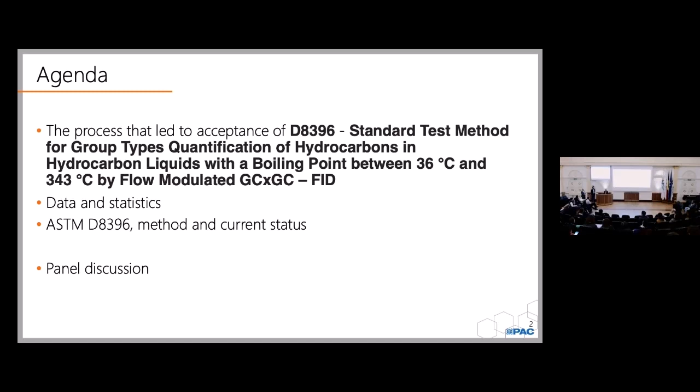So, this one. So then now I start with the story of the D8396. I call it step one, that's the idea phase. PAC, we develop all kinds of applications on request of the refinery. So we saw a need, but also discussions at ASTM.

There were discussions that we need an analysis with more, resulting in more information about especially diesel fuel and jet fuel. Most of the methods for those two products are performance-based, but there was already a need, especially with the coming of all the renewables, for more information about the composition. So a group type analysis for those fuels.

ASTM said, why don't you do it? You're here all the time, so why don't you take that task? And since PAC already had some instruments in the field, I thought it is a simple task, we can do it. In the end, it took 3 years. We are not done yet, but I think it's a very interesting project.

So we decided to start the process and decided that we would go for a generic method. In standardization, you have two choices. You can write a test method specifically for one instrument from one vendor, defining every little step of what to do to get to the result, or you decide to develop a more generic method that more suppliers can comply with, so it can be bought from more companies. In this case, we decided to go for the second one.

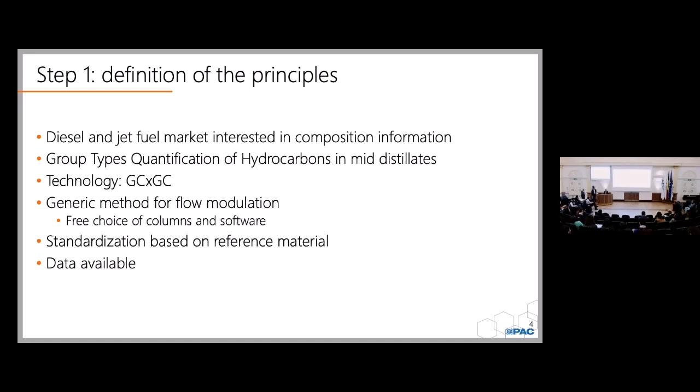So with that, we had to go and look for an organization who would, let's say, facilitate the process. And I say facilitate because all those global organizations, they don't do method development themselves. They only facilitate the process. The stakeholders are the ones who develop the methods.

There were a few choices. Of course, first of all, ISO. It's well known from ISO 9000 and such. It's a global organization, and they have an active technical committee for petroleum, TC28. The members of ISO are almost all the countries in the world. So the national standardization bodies of a certain country, like DIN for Germany, is a member at ISO petroleum.

We also had a choice to go to CEN. CEN is the organization that develops the EN methods for Europe.

And then the members are the European countries, plus a few extra, like Norway, Turkey, Israel. They are also members of CEN. And of course, we have ASTM.

ASTM is well known within the petroleum industry, but it's an American organization. Here you can see that ASTM is part of ANSI, and ANSI is part of ISO. DIN, we said before, is part of CEN, but also part of ISO.

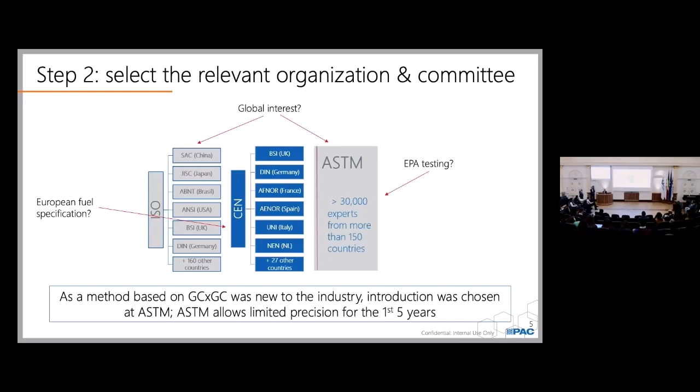So we had choices, but the discussion started at ASTM. ASTM was the first choice, and also for another reason: ASTM has a very low threshold to start method development. They allow an interim precision for the first 5 years. ISO and CEN will only start method development, or facilitate it, when you're completely done and have a full precision statement. Later you will hear what that all entails. So for the 8396, we decided to start at ASTM.

So we found ASTM, but then ASTM, of course, is also a very large organization. They have groups for anything—for toys, paint, anything. But for petroleum, it is D02.

And within D02, there are again a lot of subcommittees, task forces, committees, sections. But there's one specifically for hydrocarbon analysis: D0204. And within D0204, there are again different sections, and one for gas chromatography is section L.

So, for example, liquid chromatography would be section C. Every technology has its own section. So for the GC times GC method, the best section would be D0204 section L—so we went there, or we are a member of that group.

And that group meets twice a year. Actually, the whole D02 meets twice a year. Imagine that it's somewhere in the US, in a large hotel. They rent the whole place, all the meeting rooms, and then like 1,000 members come, and there are several meetings at the same time. You can walk in, out, and discuss all kinds of methods.

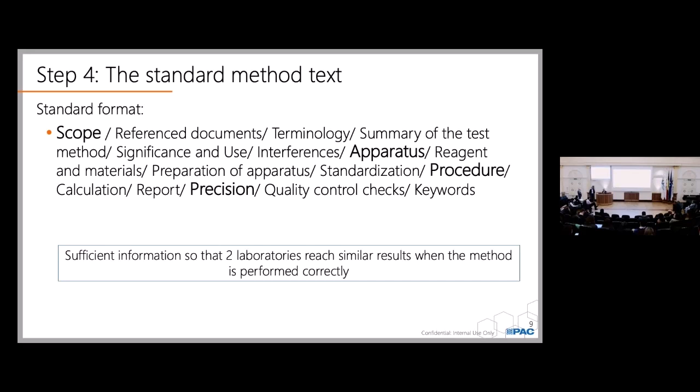It's also very important to write exactly what needs to be done, because the more strict the procedure is, the better the laboratories can follow that procedure, and the better precision you can expect. So it's always that balance on how much do I write down, how much is for the own interpretation.

So when we wrote a method, then there is this acceptance process, and that is through balloting. There are two stages. The first stage would be a subcommittee ballot, and the second stage would be the main committee ballot. Subcommittee, that's generally the experts, so they really know the technology or the application, and the main committee, that is the whole community, and they could have a different interest.

So the first step for us was to submit our method to ASTM, and then it is electronically distributed to all the members. They read it, they have a month to read it, and they can comment on it then.

One reaction could be, I don't know anything about it and I'm not interested, so they vote abstain. Some people might say, oh yeah, I like it and I totally agree with it, so they vote affirmative. And some people would say, no, this is not good, but it's minor, so they send in a comment, and then it's up to the technical contact to implement the comment or not. Or they say, no, this is not good, it has to change, and this is my proposal how to change it. And that is called a negative.

Now, in ASTM, it's 100% agreement. So if there's one negative, one person, anywhere in the world, you have to start a discussion with this person and resolve the negative.

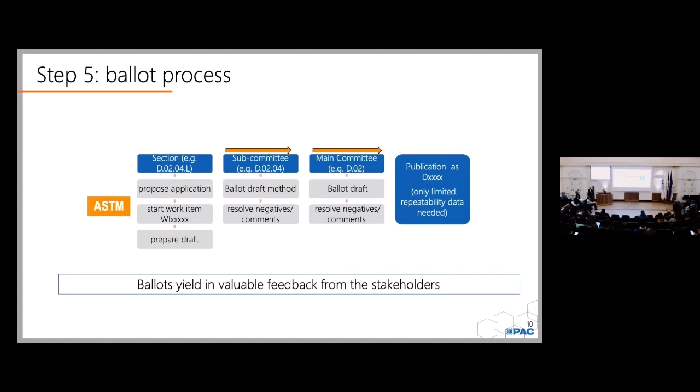So I said already before that ASTM is a bit different than CEN and ISO. And this is kind of an overview of what the main differences are.

So ASTM, those are the industry members who vote. So you deal with individuals. And for CEN and ISO, the members are actually the countries, so they vote. So it's not depending on one person, but on a whole country. And then those votes are even weighted, so if the larger countries vote positive, then you still can continue. At ASTM, you have to have 100% agreement. And for CEN and ISO, it's 71%.

Precision, very important. If it's a new technology, start at ASTM because you have some room the first 5 years. And for ISO, you have to start with a complete precision at the start.

Meetings, ASTM is very organized, so it's always the 3rd week of June, 2nd week of December. You all know for the next 10 years where you will meet and what days. And CEN, it's more on a need basis. Method updates, at ASTM you can update the method anytime.

That's also a complaint from CEN, so it could be twice a year, and then CEN also has to update their methods twice a year. That's why they prefer their own methods. And the ballot process is similar, it's at two stages.

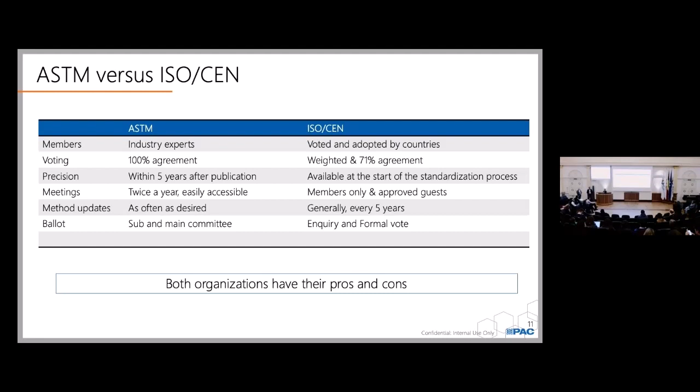In ASTM we call it sub and main, and in CEN we call it inquiry and formal vote. But anyway, after those 8 rounds of ballots, we were through, and the method was published in 2022 in April, ASTM D8396.

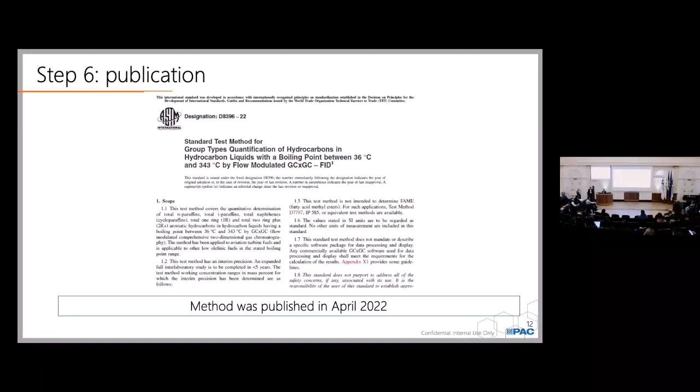We continued, and actually this was the section for John Sims, our statistician, because it's all about precision. We continued, so I didn't want to wait the 5 years.

We were going to work on a precision statement, that is a repeatability and a reproducibility calculation. And for that data, we were going to organize an interlaboratory study. All of this is really described in detail in ASTM method D6300 and ISO 4259.

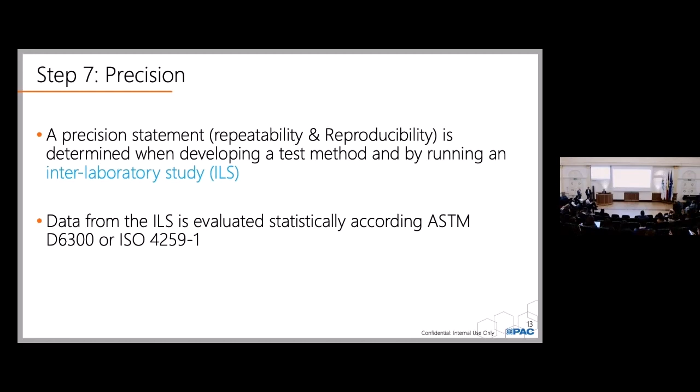So for the repeatability, we are looking at how well two results compare when the same material is used, the same procedure, the same lab, same equipment, same operator, and on the same day. So for example, when we divided and sent around our samples, we had to make sure that people could do the samples on one day.

For reproducibility, we're testing the variance for the same material, the same procedure, so the same test method, but then a different laboratory, different equipment, different operator, and maybe the same day, maybe not, we don't know.

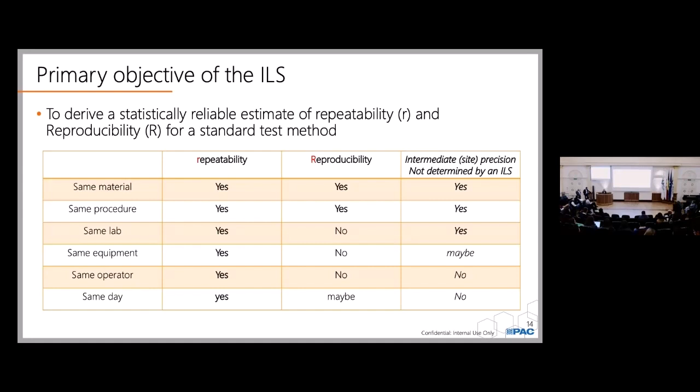Requirements for an interlaboratory study: it's quite a big study. First of all, you need a strict protocol. It's different from those round robins, where you can run the sample according to your own method. But in this case, you need a strict protocol, and the members should stick to that protocol.

The protocol could be the test method, or it could be the test method plus some additional requirements. Minimum are 6 laboratories and enough samples to get 30 degrees of freedom. That's something we cannot get around. 6 laboratories is really the minimum. For the 8396 we used 21 laboratories and 21 samples, just to make sure we get the right number of degrees of freedom.

And also in this ILS we tested different setups. It was a generic method, so people could use different columns, different modulators, different software, and we wanted to test how well all these variables compare.

The samples shall cover the range of the method, so the percentage - if it's 20 to 40% what you want to test, then those samples need to cover that range. So you really have to design your ILS well and make sure that all matrices and ranges are covered.

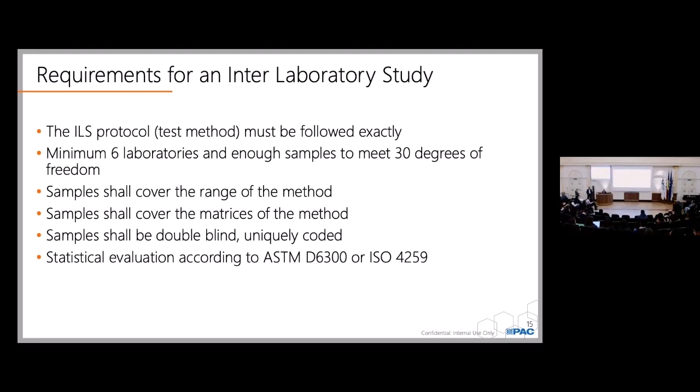These are the methods we use for the statistical evaluation. Now, variables - what we have to focus on, and that will also be a question later in the discussion - we really have to control all these variables in order to get similar test results: environment, equipment, operator, procedure, material. That's what we need to control when we determine the repeatability and reproducibility.

This is an example of a precision statement. So it states the parameter, the repeatability at a certain level, and the reproducibility.

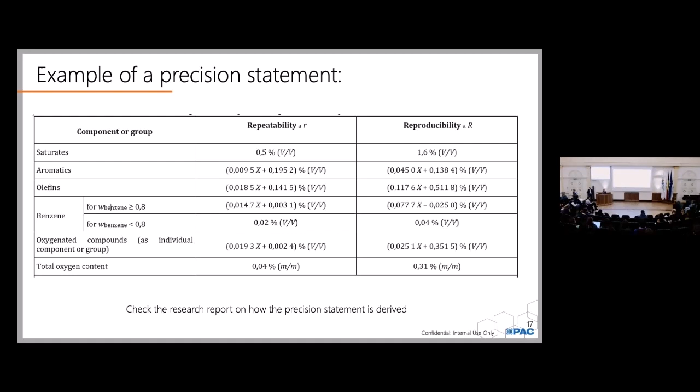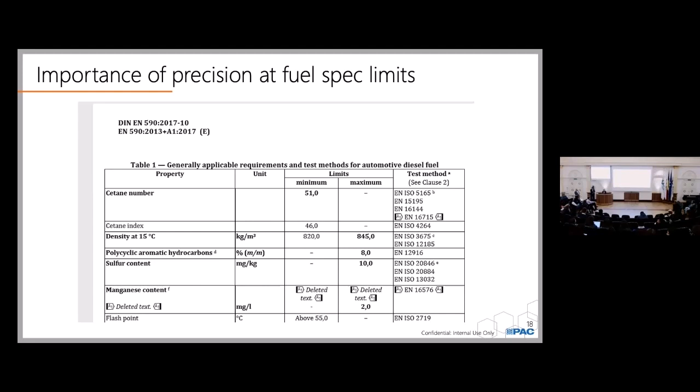And then the last point is the importance of precision for the fuel specification. For us, as a company developing applications and instruments for the petroleum industry, our ultimate goal is always to be mentioned in the fuel specification, because that is the highest you can reach for. So if the fuel specification, for example, says the sulfur content is 10 ppm, any instrument or application you develop should at least cover those 10 ppm well. Then you have a chance to be accepted in the fuel specification.

And then I hand over the mic to Job for more detailed information.

So for slightly more details on the method - and I know you guys are dying to start analyzing those whiskey flavors - so I'll try to go through it quickly.

So first I would like to share a little bit of background on why this method is important. And we realized this only after starting the ballot process. Initially our application was developed for middle distillates, but we found out that most of the interest in this method was really coming from the jet fuel people.

The reason, as mentioned before in one of the presentations, is that the hydrocarbon type composition describes something about your fuel quality and your combustion properties, burning efficiency, soot formation. The other thing is that particularly the aromatics content relates to the compatibility with the fuel system. So in the fuel system in your car, but also in airplanes, there are seals used, and those seals swell a little bit upon contact with aromatics, and that makes sure that you have a leak-tight fuel system.

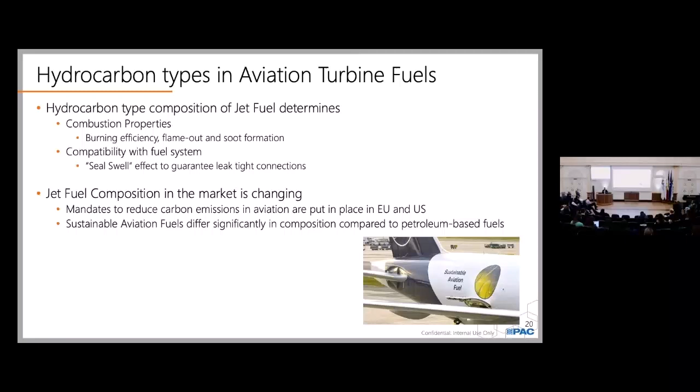There are currently about, I think, 7 — this lists 5 — there are about 5 to 7 pathways that are certified within ASTM to produce sustainable jet fuel. The most important one is currently called the HEFA process, hydroprocessed esters and fatty acids. There are a few manufacturers across the globe that produce sustainable aviation fuel with those technologies, but there is really a lot of research and development ongoing in certifying more processes.

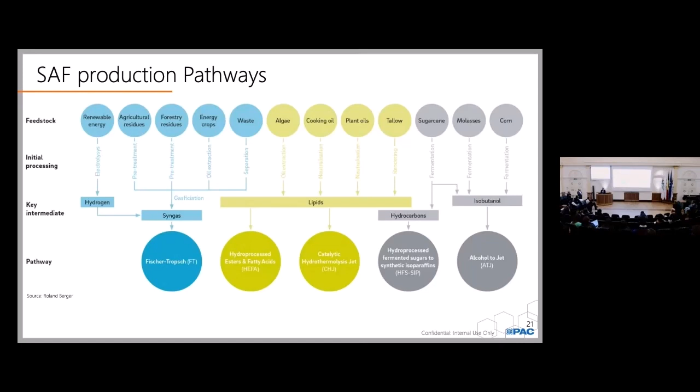For aromatics in jet, for hydrocarbon type content of jet, there are 2 specifications that govern those. ASTM D1655, which is the standard spec for jet fuel, is kind of linked to the DEF STAN 91-091 spec used in the UK, so they're harmonized. They list a maximum content of aromatics, 25%. But for synthetic jet fuel, there are additional requirements.

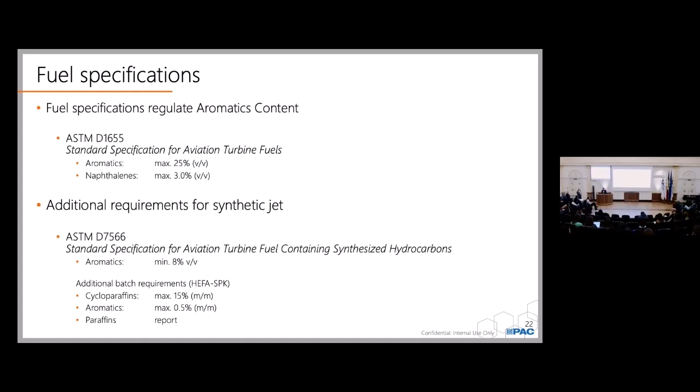Those additional requirements are described in ASTM 7566, and it's actually a 2-step process. You have to certify your pure synthetic jet, which is very low in aromatics — you can see the specification limits there. And then, because it needs to contain a minimum amount, you need to blend it with an aromatic-based stream, which can be traditional petrojet or something else. It then lists an 8% specification as a minimum.

The most common one is really liquid chromatography. For synthetic jets, there is an MS method, 2425, a very old one, using column chromatography as a sample prep. And we think that for both these applications, GCxGC can be a better performing alternative.

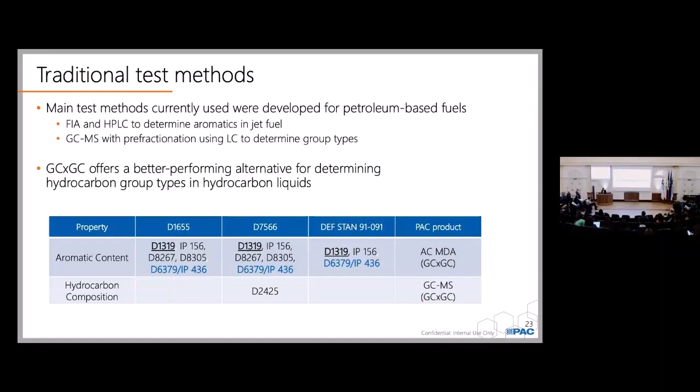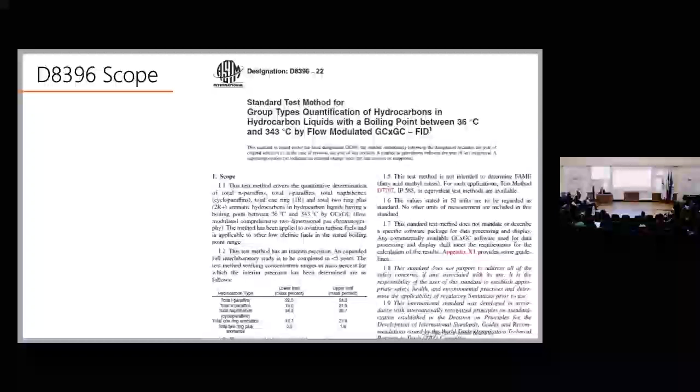So as Lenny mentioned, we got the method published in April 2022. The scope is probably not readable, but as Lenny mentioned, it's quite critical in terms of getting your method accepted in the industry, so it needs to describe very well what it does and also what it doesn't do. So there are some disclaimers there.

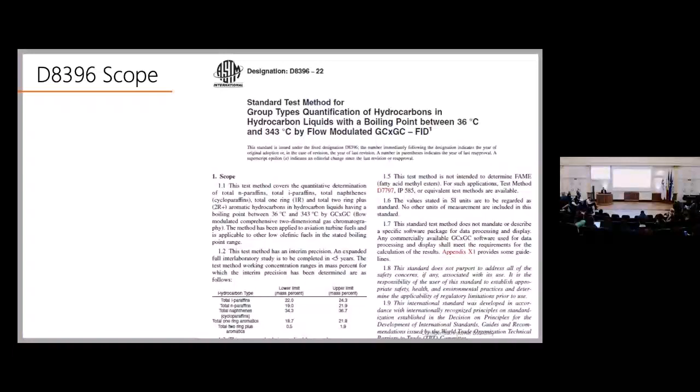You can see, I think I have a slide later on as well, that there is also a range listed in which the method can be used, with an interim precision statement. This is actually based on the analysis that we did in our lab.

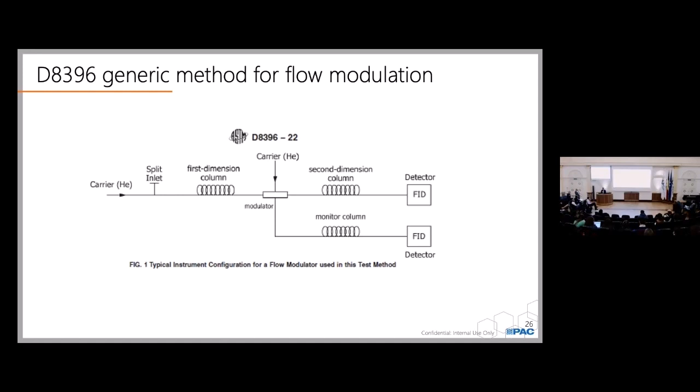So we decided to write a generic method, as Lenny explained, for flow modulation. This is a trimmed down flow diagram to help the user a little bit in understanding what needs to be done to set up this instrument.

And obviously, if you are going to write a standard test method, you have to think about how to standardize it. There should be certain criteria in the method that allow users to validate whether they can meet those criteria, yes or no. I think this can be part of the discussion later on, because in traditional one-dimensional chromatography, we have resolution criteria or sensitivity criteria, which cannot be easily translated into the 2D realm.

So what we decided is that we would create a gravimetric blend, which is the top sample you can see, where we know the concentration, and we can use that blend to verify if your instrument is behaving as you expect. In the method, we use theoretical response factors, and by using this matrix, we can qualify if your instrument performs as you would expect.

Then as a second step, we have a real-life sample. We have accepted reference values from a limited round-robin study, and those you will use as validation of your instrument. So that means the largest or most important driver for standardization in this test method is actually driven by those two samples. And there is room for improvement here to do it in a better way, I guess.

So this is the interim precision statement, again described in ASTM D6300, how you should do it. And this is, I think, 3 different samples that were in our lab, 10 replicates or something.

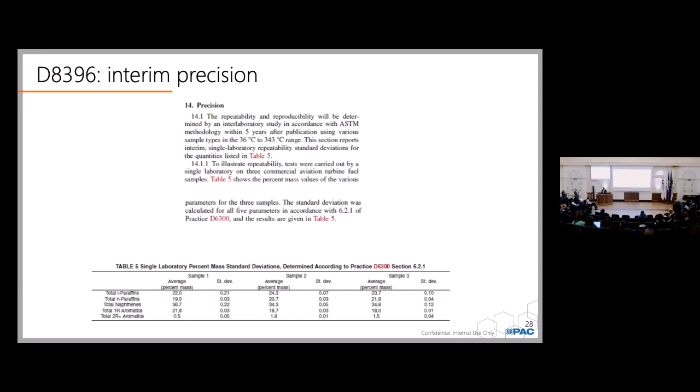Currently, once we have the method accepted, as Lenny explained, we should start work on a precision statement to make sure the method can actually be used for custody transfer operations. And that's what's currently ongoing.

So we are running a quite extensive ILS. Normally you have problems finding participants, but in this case we have rather too many than too few. That shows again that there is a lot of interest in this technology and in getting it out in the market.

And there, we actually have all kinds of different users. So we have people using cryomodulation, normal phase, different software packages. We are really trying to see how that influences the analytical performance of the method.

One other thing we would like to find out: for these synthetic jet fuels, the detection limit for the aromatics is quite low. There's a specification of 0.5 mass percent, and we want to verify with this ILS if that is a limit we can practically achieve in the field. It's called the pooled limit of quantification.

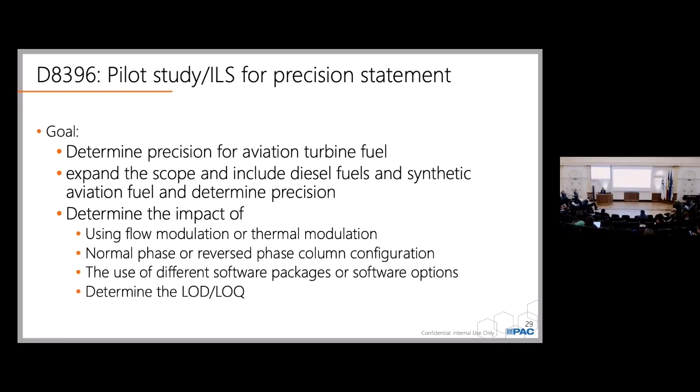And again, the different software packages we've seen have a slightly different approach to integrating those very low levels of components, and that can actually influence the result quite a bit.

So we have about 21 ILS participants, which is really a lot. 6 different jet samples, 8 synthetic jets, and 8 diesel fuels. We have about 18 results submitted so far.

The initial evaluation of the data shows that the variation is much larger than we had hoped for, and it's actually not good enough really to go further with the method development. We are currently in discussion with all the participants to see what we can do to further improve the reproducibility of the test method.

So we had a discussion a few weeks ago, and we are having another one planned for mid-February.

Maybe Lenny, you want to comment on it, but obviously the performance criteria are one thing that you need to standardize, and the other, which is a little bit susceptible to interpretation, is the setting of the templates. We have seen some nice examples today of how they can be automated, but it's currently not practically feasible in the field yet.

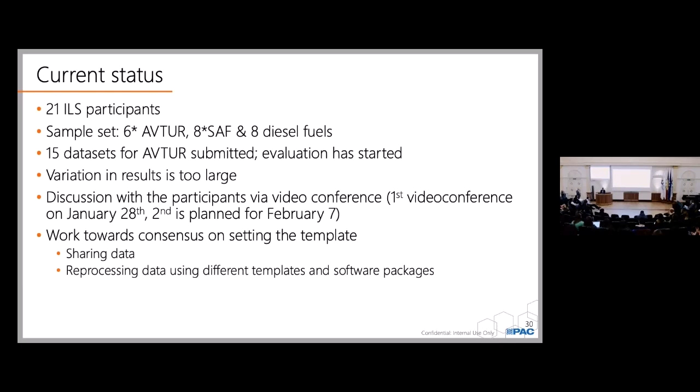So that brings us to you guys. Having heard all of this, do you think you have tips for us that we could implement in this method to further improve the performance? I'm not sure if you want to add anything to that for the audience.

Well, I don't have much to say. What I'll say is we collaborate with a few petrochemistry companies. They already use GCxGC in their lab to evaluate the fuels. Most of them use it for the pyrolysis oils. There is a huge company called Unipetrol in the Czech Republic. They have a research department.

They're already using it. But the question for the audience is, since most of you are using GCxGC, if this should be a standardized method, what would you like to see in the method, and what would be basically the reproducibility data you would be happy with to use?

Just please remember that we don't distinguish the carbon numbers. All the isoalkanes are grouped together. I think they are actually grouped with paraffins, right? And alkanes. So all the cyclonaphthenes are grouped together and aromatics as well, mono and poly. So that, I think, will be part of the discussion.

Or do we have more slides? No, this was the slide.

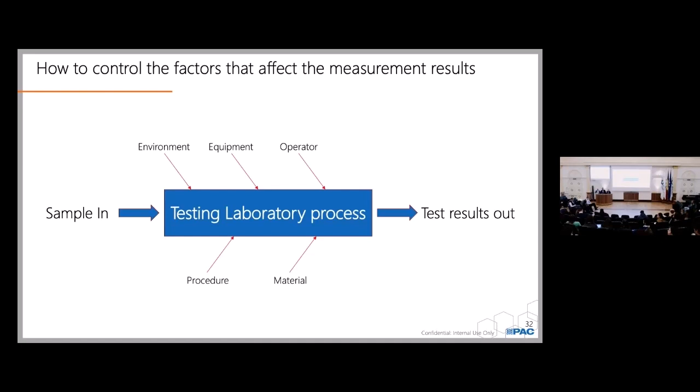Yeah, so thank you, I think those are valuable comments, and I think they relate to what we also see in the ILS, and I asked the question already before. So currently we are looking only at this reference sample, but if there are suggestions to add additional criteria where you can qualify your method with, that would be helpful.

As you know, the analogy is obviously the resolution in 1D GC. Yeah, in terms of quality control and repeatability, obviously, hopefully that will come from the study to see what is acceptable, yes or no, in terms of a deviation of results.

So if you have a different matrix, you can start to see some overloading or peak shifting, and that will affect your templates. So we can second that. It would be nice if there were a way that is standardized across the industry how to go about these questions. So, thank you.

I hope these 21 participants continue that journey with us to make this method better. It's a matter of running samples, discussing, improving, opening up. What did you do? What is good? Share good practices, and then you'll get a good method. Remember, the existing methods are not that reproducible, so our target is not so high, but we want to have it as good as possible. We want to learn from this study.